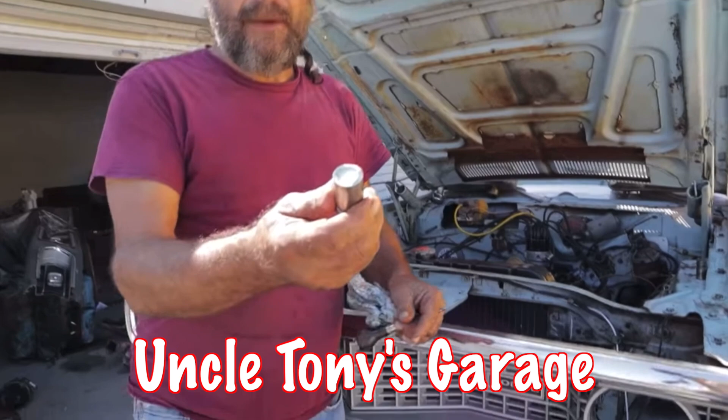There's been a lot of videos coming up lately on cam and lifter failures, and some of your favorite channels have had videos kind of like this. This is what happens when you roll the dice. Right. The cam lobe matches that.

Or like this. Bad lifter, in case you're new here, it's junk. Or like this. This is interesting. Three different failures of different flavors. And there's many other videos out there on cam failures and lifters. And we're having problems with soft lifters, the bottoms wiping out in 15 minutes to 45 minutes to an hour.

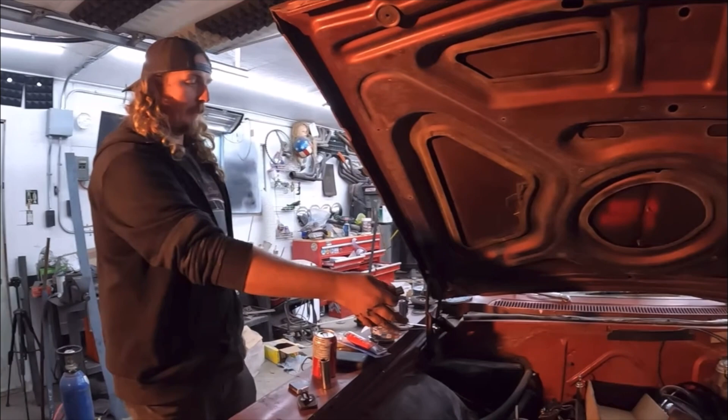So, what's going on? Wrong. Now, I honestly believe what happened was this lifter failed and ate the camshaft. There's all sorts of stuff all over the internet. Lifters are failing left and right, and that's exactly what I think happened here. So I really want to emphasize that I am not any kind of expert. I'm kind of a regular guy, just like you.

As you know, we're doing the Piggy Bank Horsepower Challenge. A group of us are doing some Mopar engine builds, trying to make as much horsepower as we can on the tightest budget that we can. And one thing around the corner is going to be the camshaft. I've been seeing videos of these cam failures and lifter failures, and it's kind of scary. And so before I got to that point, I've been trying to watch a lot of videos on the topic.

There's been a lot of issues with flat tappet lifters lately. Now, this is usually when you get a cam failure, is when you get cocky and you say, I've never had a cam failure. I thought, it's user error. It's always user error when something screws up in my mind until I do it myself. I've only had one lifter fail on me once. It wasn't during break-in. It was long after break-in on a small block Mopar.

I feel like my current break-in procedure and materials I use is very robust. I haven't had a failure with it, but in the process of doing all of this research, I've decided to change my cam break-in procedure and try to stack the odds in my favor. And really it's not so much the procedure that's going to change. It's going to be the materials, namely the oil and assembly lube.

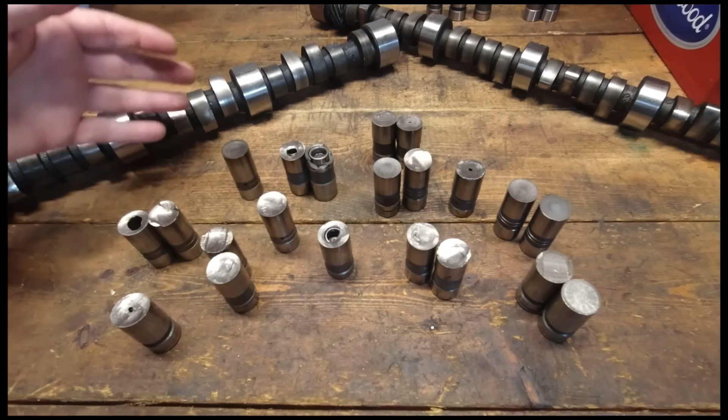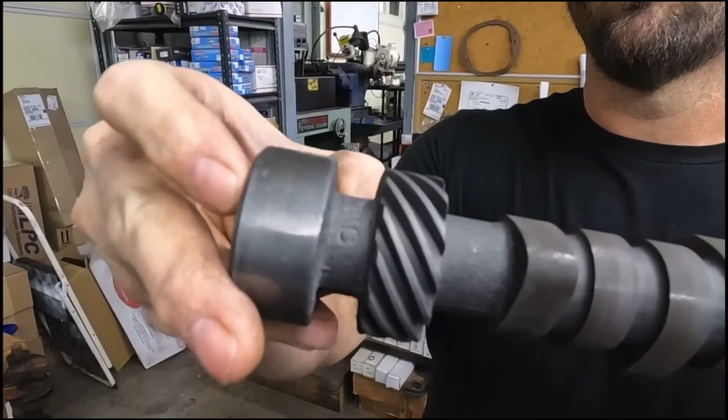I can tell you that all of these are sourced here from the U.S., because I know what brands each one of these were and why they failed. At least we can make a good assumption of why they failed. Cam cores are primarily made by 2 sources, and both of those are in Michigan. And I will tell you that it's probably not the cam cores that are suffering the problems. And how you can know that, you will see their logo, CWC, cast into the spool.

And every one of these cams are all American made. And I haven't seen one any other way. So we can kind of dispel that. Well, but I can tell you that everything that you see here on my benchtop is 100% made in the U.S.

If you want to increase the odds of having success, I would avoid getting those cheap camshafts that are, we'll call them generic brands, okay? Generic brands, or they might be branded under a parts distributor or something like that. I would stay away from those. Now, I'm not saying all of those cams are bad. I don't know. But I think the first insurance policy is stay away from those cheap cams and let's stick to name brand camshafts, okay?

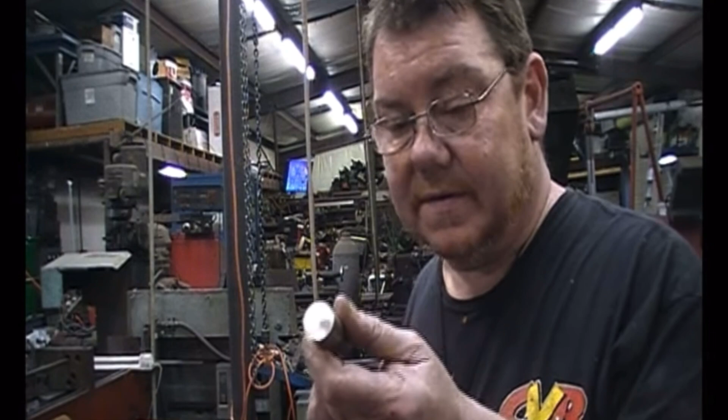There's a lot of Chinesium stuff out there, and there are lifters coming from China, but there's pretty much this big controversy over what's causing this camshaft failure thing. So a lot of them are saying it's the hardness of the lifter. A lot of them are saying it's the hardness of the camshaft.

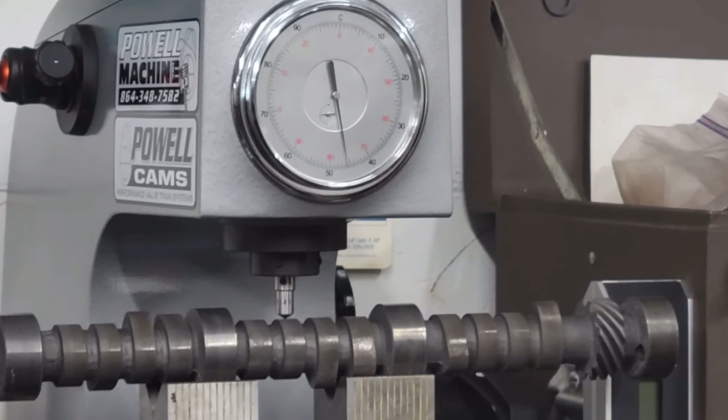One of the guys that I like to watch on YouTube I've recently discovered is Powell Machining, or Powell Machine. He actually went through several camshafts. Some had failures, and he did hardness checks, and he checked some lifters, and it looks like hardness is not the issue. So that cam is 46. So it's 46 Rockwell on the C scale, which is pretty normal. That's what we see. And it killed a couple of lobes.

That's one of our Thunder Bomber cams that had some fuel issues and they spun it over for half a day, so they wiped all the lube off. 53. So that's really good. This cam right here is a FE Ford. The taper looks good. Nothing wrong with the cam. You can see CWC right there. But this one was ground by Comp. But it's fine. There's nothing wrong with it. And I'm sure it'll test fine. Yeah, and it's sitting right on 50. From what I've seen, anything over 45 is pretty good.

And of course, along with camshaft hardness, there's lifter hardness to consider. But Powell also did a bunch of hardness checks on a whole bunch of different lifters, including cheap Chinese lifters, and they all came out pretty good. This is a Delphi lifter. This is a brand new China eBay special hydraulic lifter set. I think they were $45 or something. It's just super cheap. And this is an import lifter that we sell with a hard foot, a Stellite foot, and we've had really good success with them. And we'll check all three of these.

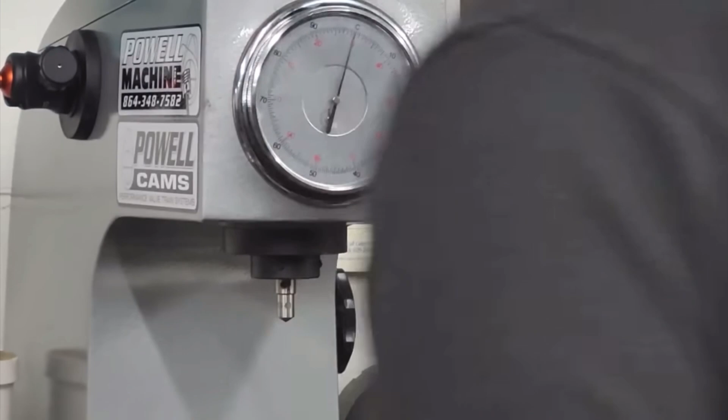And I don't have them anymore, but I had some solid, $300 a set oil hole lifters. But I checked those too, and actually they were the softest out of the pile. The most expensive ones were the softest. But we're going to check these and see what they say. So we'll start with the factory GM. All right, so that lifter is 58. All right, we'll do our import lifter that we sell with the hard foot like the Delphi. And it is dead on 58 also.

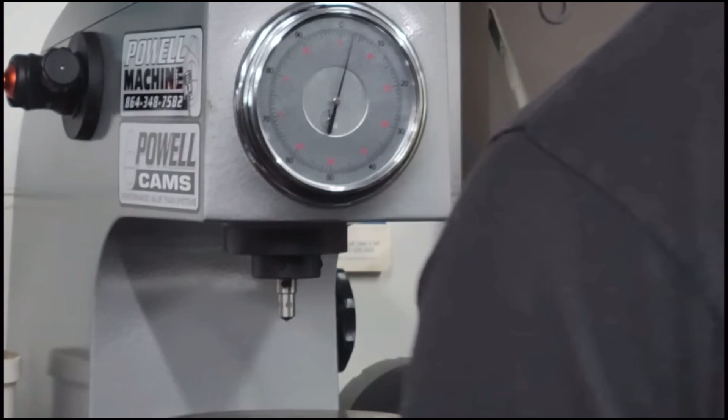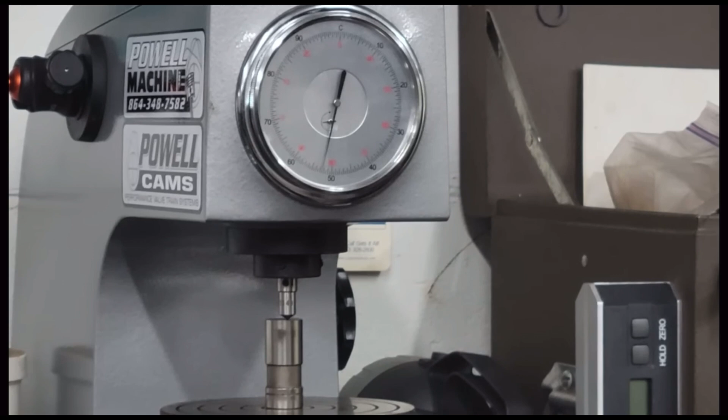And then the China eBay. And that one's just right at 58. It's not quite 58. And I got one more. I think this is a Melling. And that one's 52. So it's the softest of the pile. Anything over 50 should be fine. And the same thing with the cams. We see stuff high 40s up, and we just rarely have any problems. Whatever the problem is, it's not hardness.

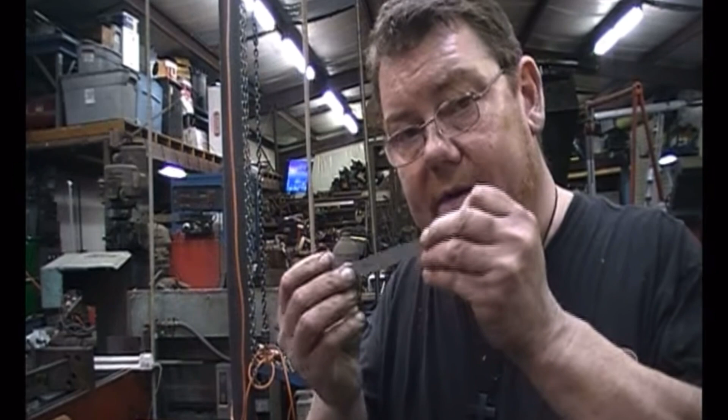So another potential issue is geometry or the grind on the camshaft and/or the lifter. But the way that this works is the lobe is tapered to one side. The lifter is tapered as well, and when that lobe gets against that, it tends to make the lifter want to spin, which acts like a bearing. So it's not just sitting there rubbing going up and down, because that will make one go flat. That's when a cam goes flat.

One of the things you need to do is check the taper in the lifter. If the lifter has no taper in it, send them back. But there again, buy lifters from a good company. You have to have a taper on the cam lobe, and you have to have a crown on the lifter. And what that does is basically promote rotation of the lifter.

And so if you have a flat cam lobe, you're not going to get the rotation that you need, and that can lead to cam failure. I do know that if the camshaft doesn't have enough taper in it and the lifter doesn't have enough taper in it, the cam's going to go flat, no matter how much zinc you put in it, no matter what.

And so this is another customer that's got a big block Buick, and he's put 3 of these in, and they've all died on break-in. And it's probably got half the lobes gone. If you look at it, you don't see that wear line. You don't see that taper. And I mic'd this cam, and it has absolutely 0 lobe taper.

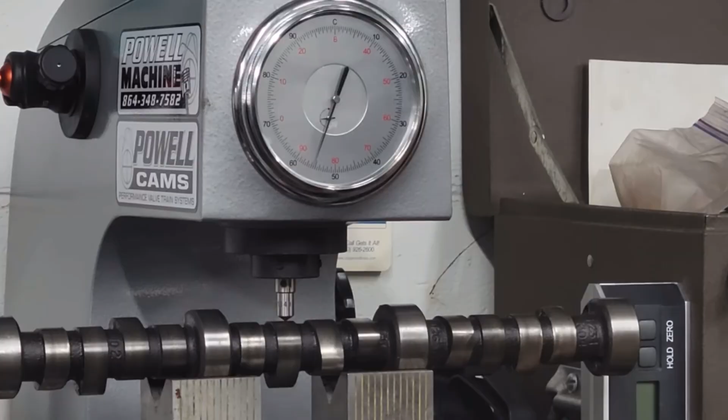And you can see, especially a cam that's been used, if you look, you can see the line. So you can see it's high over here. So that's the taper pushing it to the back of the engine. And that makes the lifter rotate. And so taper is a big deal. We don't see too many taper issues, but when you pull a used cam out and you see that and it's consistent down the cam, you know that the lobe was ground correctly with the right amount of taper. And so that one's 53 also.

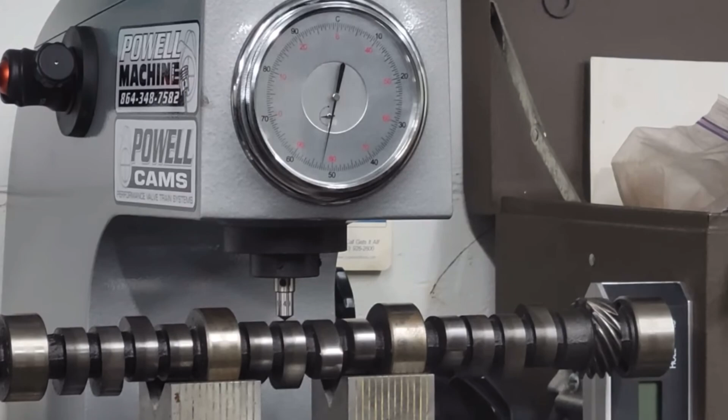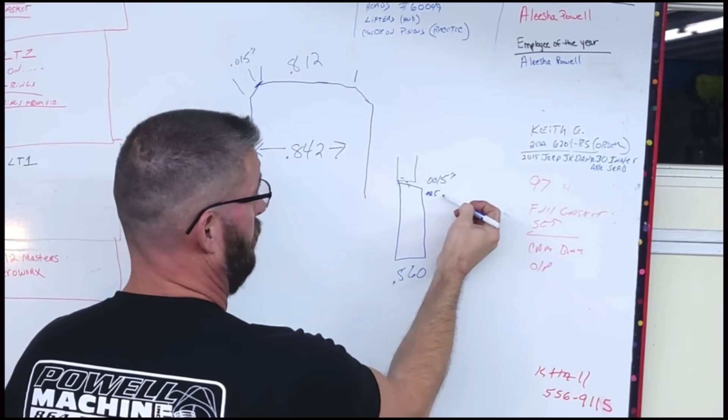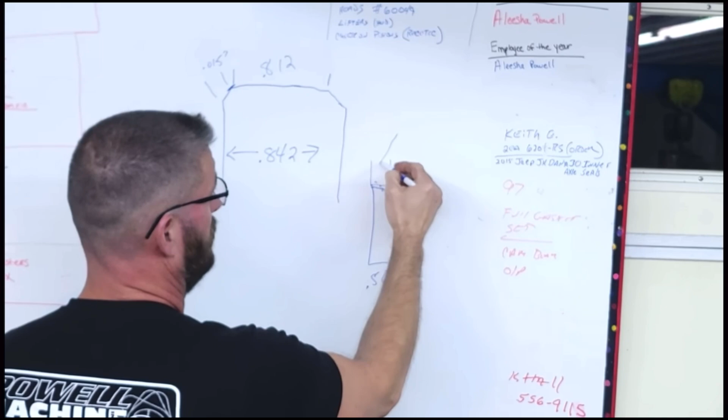Not only do you have to have taper in the camshaft lobe and in the lifter, they have to match each other, and they can't be too much. And you also have to have a straight lifter bore. Because if these two are perfect and you have excessive lifter bore clearance, now the lifter rocks on an angle like this, and depending on these two numbers, it could help the problem or it can make it worse.

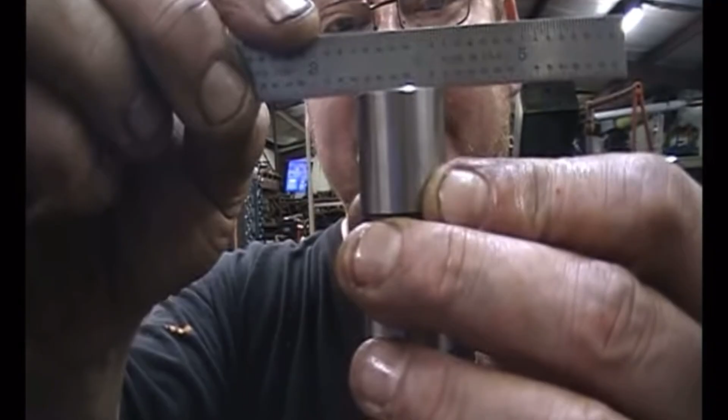If you want to check a lifter, the way you check a lifter is you hold something flat, like a straight edge, up to it, and it's going to be hard to see because there's no light behind me here, but you should be able to see light on the edges. You should be able to rock that back and forth, and it should have about, I don't know, 1.5 thousandths or so to 2 thousandths. You know, they can't have too much, but you want to check that.

If you can hold something flat up against the light and see light on the edges, then you're probably good to go. If there's not a whole lot of light, you probably got an issue, and I have had some lifters that didn't have enough taper in them, and I sent them bastards back. And if it's just ground incorrectly, maybe it's got too much taper, or maybe the crown in the lifter is just not a good surface to begin with. Those can all be contributing factors to failure.

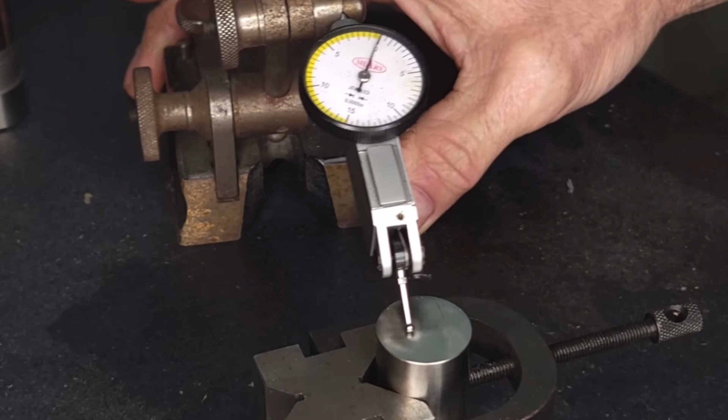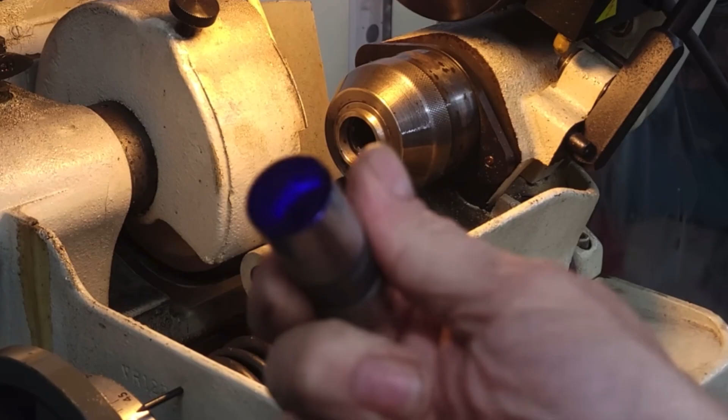I mean, that's 2.5. And we'll come over to the other side. And that's 2.5. And that's a little more than 2.5. And that's right on 2.5. So you see how much taper that's got. And like I say, it just doesn't need that much. So let's go over to the grinder, and then we're gonna face 1 or 2, and I'm gonna show you what they look like. I Dykemed up the face just so you'll be able to visually see what's touching and what's not touching.

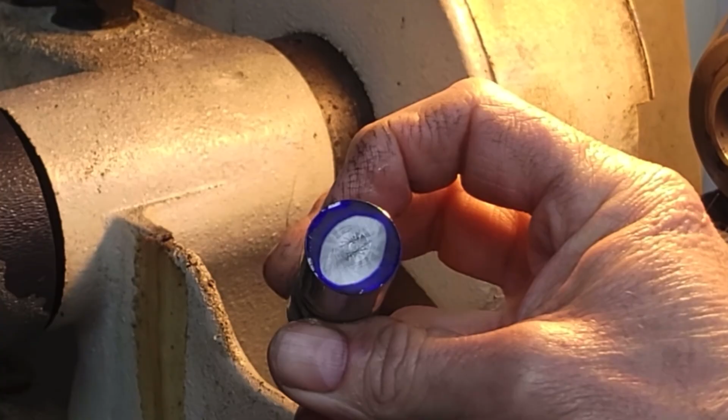But almost every set of lifters I grind have that problem. And so it's going to be hard to make that roll. And I mean, how can that work? So, but that ain't all the problems. There's more problems other than that. I mean, we got angles. We got the face ain't even flat or round.

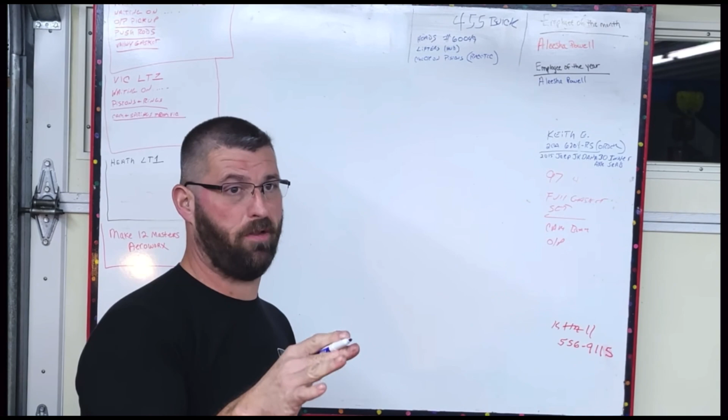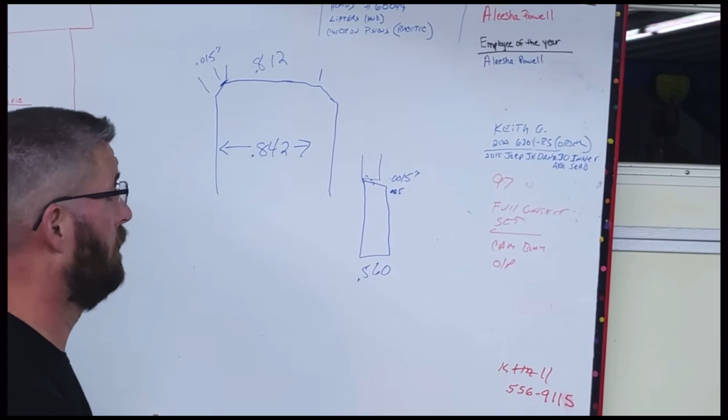I mean, it's insane. But the next problem is the chamfer on the corner. The chamfer that they put on the lifter is a problem. And I'm going to show you why it's a problem. So the edge of the cam would just be touching one small part of the lifter, and so you have no load-bearing area.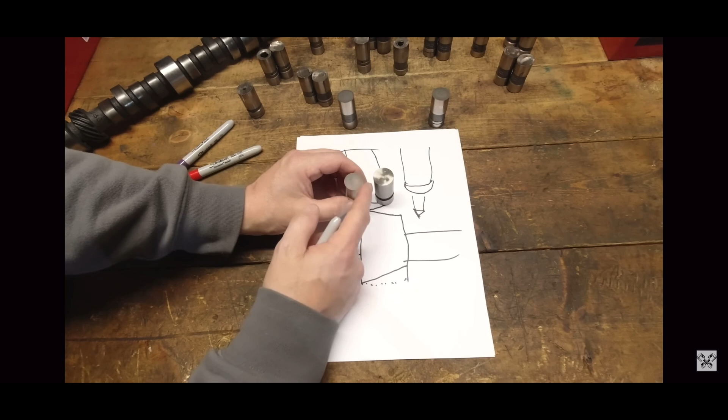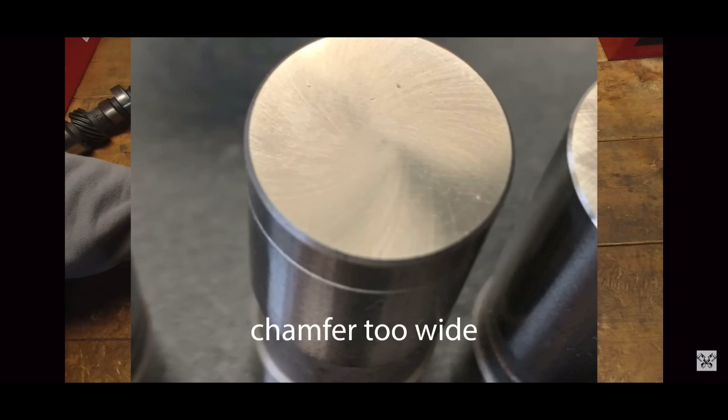It's decent, but you can tell it's got a much wider chamfer than this one does here. And that's a big difference. When you take even just that very minute surface area off, you're leaving out the workable area of that lifter onto the lobe. I've seen some of these that are horrible in the chamfer, and that is a real bad indication of a lifter that was not ground correctly, or to a manufacturer's spec that, I won't say they don't know what they're doing, but it's a little confusing why they would put that much chamfer in it.

So who should you buy a camshaft from? I mean, you've got all these issues with cam lobe taper and lifter taper, and I know what you shouldn't do: you should never buy the camshaft and the lifter separately, based on everything that I've seen and heard. If you buy a Howard's camshaft, buy the Howard's lifters that go with it. Don't mix and match. They're designed to work together. If you're going to run a Howard's or an Isky or a Comp or whatever, Lunati, it doesn't matter. Match the lifter to their cam and go with their recommendation.

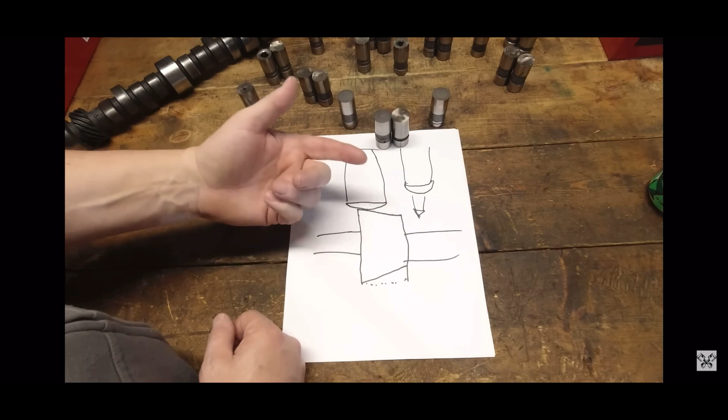Don't switch brands. Don't run a Comp and then go, well, I can't get the Comp lifters or they're on back order, I found a set on the internet somewhere off eBay, I'll just run those, they're flat tappet lifters, they're fine. They're not. Don't. You're going to void your warranty for one, which could cause issues if you don't do this break-in properly. But also, two, they're designed to work together. So don't cheat yourself out of it.

One camshaft brand might have 1.5 thou taper. Another camshaft brand might have 2 thou taper, and you mix the two, and they just don't mesh. They're not made for each other. They need to be the same. Before you put it in the engine, before you lube it, before you do anything else, check the lobes. Make sure that you've got at least 2 thousandths or 3 thousandths of an inch taper on the lobe. Because without that, the lifter's not going to spin and it's just going to wear.

Now, lobe taper is a big deal, and the crown on the lifter. By the way, there's a lot of math involved in measuring that. When you measure the taper across the cam lobe, that is a greater distance. So you might have 2.5 thousandths of taper across the whole cam lobe. But when you're measuring the lifter, you're just measuring from the center to the edge, which is a shorter distance. So you might get 1.5 thousandths taper on the lifter, and the matching taper on the cam lobe might be 2.5 thousandths. What that math is exactly, I don't know. But keep that in mind. Just buy the sets together and probably get a name brand.

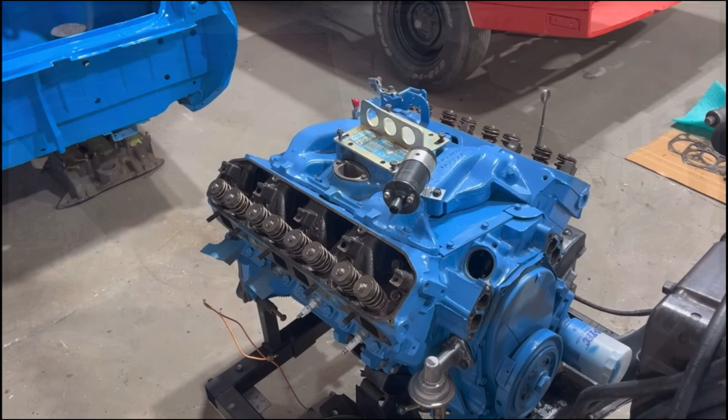It's a matter of who do you trust, right? Been seeing a lot of videos and a lot of criticism. Whatever it is, it definitely won't be from a company that rhymes with stomp. Everybody I talked to said, I hate to keep throwing Comp under the bus here, but they weren't the most helpful, and I feel like I did pay my money. I guess their lifters, the quality control, they're straight from China. They just slap them in a box, put a sticker on them, and send them out the door. That's what people have told me. That's what the machine shop said. Are they the problem? I don't know. My gut tells me that it's the oil.

When I get to buying the cam for the Junkyard Dog, our piggy bank horsepower engine build, one of the biggest things I wanted to do was actually use a Comp cam, for two reasons. Number one, if oil is truly the issue, then there should be no problem with the Comp cam. And if I can get a Comp cam to break in and not have a failure, then that kind of helps support the idea that the problem is in the oil, assembly lube, or break-in oil, or whatever, and it's not in the camshaft itself.

The other reason was, unfortunately, some of my favorite cams, because I just have street cars, I don't have race cars. But in the street car arena, I'm very happy with the Mopar Performance camshafts, or the Direct Connection camshafts from back in the day.

I shouldn't say I've never had a problem. That one small block I had a problem with was a purple shaft. But other than that, I haven't had any problems with purple shaft cams. I feel confident in them, and unfortunately they don't make them anymore. They probably never made them to begin with. They probably had somebody else make them, and they just repackaged them as Mopar Performance. But at any rate, they don't make them anymore. You can't get a Mopar Performance purple shaft cam.

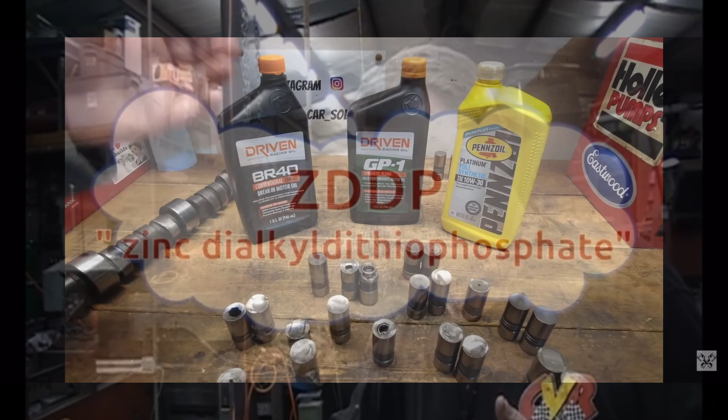There was a video not too long ago about a Canadian YouTuber. He's got a ton of subscribers. Seems like a pretty good guy. He's built a lot of stuff, but had a big block that he put together and it failed. Well, it was pretty evident as I watched the video the reasons why he was experiencing the failure that he got. So there's a bunch of questions in the comments. We'll just address those real quick.

What kind of oil did I use? I used 15W-40. I believe it was Rotella or Mobil. I don't remember what I had, but one of them was the oil. A popular thing is, I'll just use diesel oil. It's got a ton of zinc in it. It'll be fine. They used to have a lot of zinc in it. They don't any longer. The EPA changed that API that they follow for the recipe, and they can't include as much zinc in it anymore. So it doesn't have enough zinc.

But the other side of that is when you take an off-the-shelf oil of anything and say, okay, well, I'll just go grab 5-6 quarts of whatever at my local auto parts store, and I'll add a zinc additive in there, and it'll be just fine for my everyday oil. Was there zinc in the oil? I had the additive. So with zinc additives, it turns out it's extremely complicated, and it's not as simple as just pouring it into your engine and boom, you've got zinc in your oil.

I thought, what, you just buy this zinc additive, you pour it in the engine and you're good? Turns out, no, it does not just blend with oil, and here's why. There's two things that happen with that. Because zinc is a certain type of material, I believe it's an acid, and the detergent packages that are in a regular API oil or a regular engine oil is a base, they fight each other. The detergent sees the zinc as a negative and it tries to eliminate it. It wipes it off the cam as quick as possible. Those materials that make up an additive package for the detergent side of a regular engine oil will fight it.

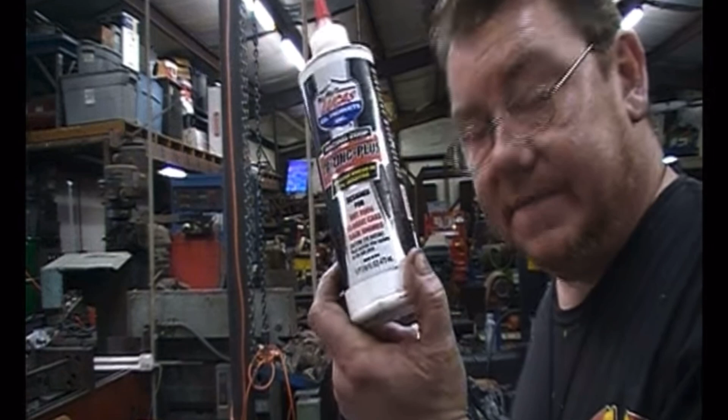I've had some success with this, but don't try to use this with just a regular old conventional oil, because this is an additive. This is not an oil that's designed for flat tappet break-in. This is just an additive to put the zinc in the oil. And quite frankly, after I took a pretty good seminar on oil, I don't recommend using this unless it's the only thing you can find, but use it with another good oil like VR1 or Joe Gibbs oil or something.

I always found it curious that there just doesn't seem to be a lot of information on oil, or at least there hasn't been in the past. But fortunately with YouTube, there's a lot of information out there at your fingertips, but you do have to dig for it. And oil is probably one of the most important aspects to an engine's survival, and yet the information on oil is not common knowledge. It should be the one thing we all know about and understand more than anything else about an engine.

It's like this top secret thing that nobody knows about, and then somebody gets some sort of hack like, hey, use diesel oil, it's got tons of zinc in it, and then the EPA comes along and makes changes, and now diesel oil doesn't have any zinc in it anymore, but nobody told anybody. So, does everybody know that? I didn't know that. I keep hearing that from people. Buy diesel oil, it's got zinc in it. And then I go to the store and I'm looking at the label on the front and the back, and I don't see anything about zinc.